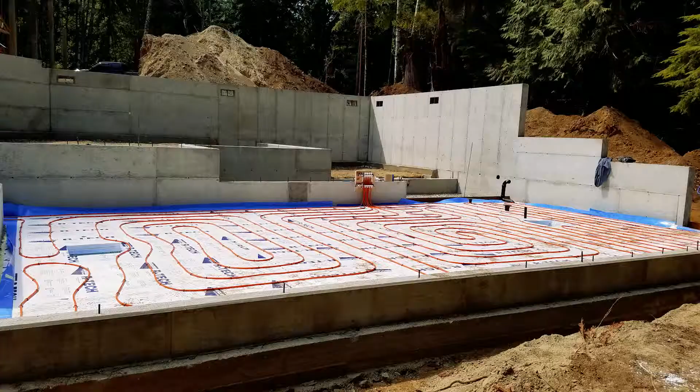So I just opened the box for the floor heat here. This will be the main system for the house. Right now I have a small one-zone system that's just running the basement slab and keeping the house warmed through the winter. But since I'm here in the pole barn, and it's been like 38, 39 degrees in here with the humidity around this level, let's take a walk over and look.

It's been pretty cold in this pole barn. Even though it's warm outside, it stays cold - a low of 39 and a high of 43. The humidity has been between 83 and 85% the whole time, and it doesn't seem to budge off of that. Might as well hook up the heating system and warm it up a little bit in here to drop that humidity down to reasonable levels, because we don't want any of this stuff to start to mold for no reason.

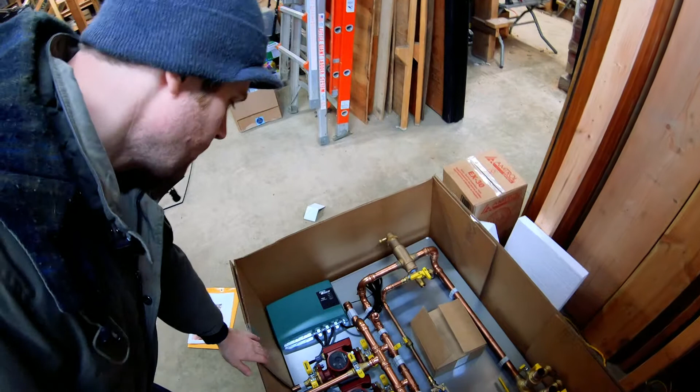So this is a 3-zone system. You've got your 3 pumps here. That's an expansion tank right there that will go right where that box is. This goes to your heat source. This is your fresh water that comes in - it's your fill, this is your little backflow preventer and your pressure bell. That hole and this hole, there's some pressure gauges in that box that get screwed in. And this is your air vent. A pretty simple system all in all.

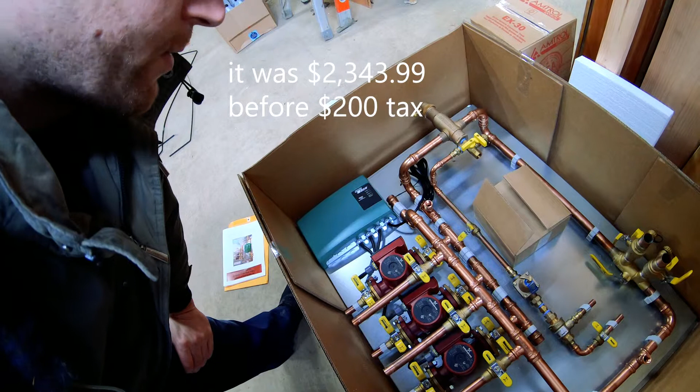But it was, I think, like $2,200 to $2,300, something like that. So, not exactly cheap, but the heat they deliver is fantastic.

And hopefully this one doesn't have any leaks. So the plan today is to take the dimensions of this and go down and figure out how it will fit into the basement. Go down in the basement and figure out how to take apart the old system, drain it, and insert this one, and connect everything. Looks like I can make a parts list of what I need, because I'm going to have a lot of stuff to get connected. I'll also look at the weather before I take apart everything, and make sure I'm not going to expose the house to freezing temps without a heat source. So I'm going to go take a look.

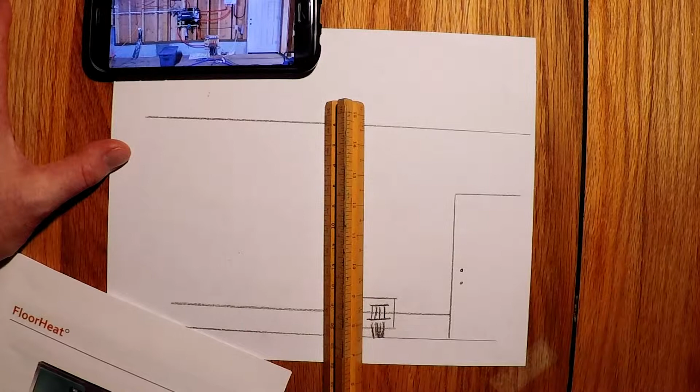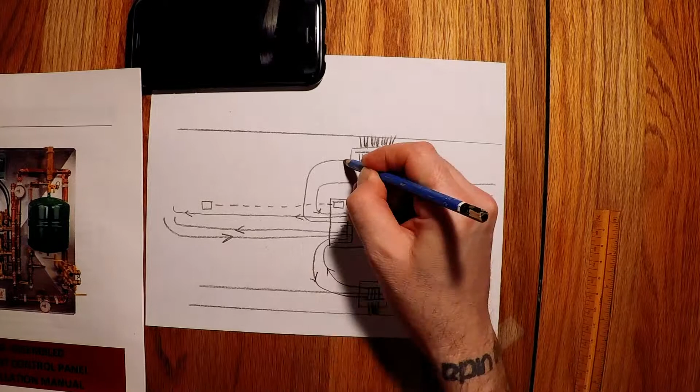So I went down and took a picture of the system that I have down in the basement, and I took it home and decided to sketch up a rough sketch of what's down there so I can get an idea of how I'm going to run some of these heating tubes and orient all the various components in this system. Just a quick rough crude sketch to get a rough idea of everything, and then next I'm going to do a more precise drawing so I can get a more accurate description of the parts I'll need for this. I always like to draw everything out.

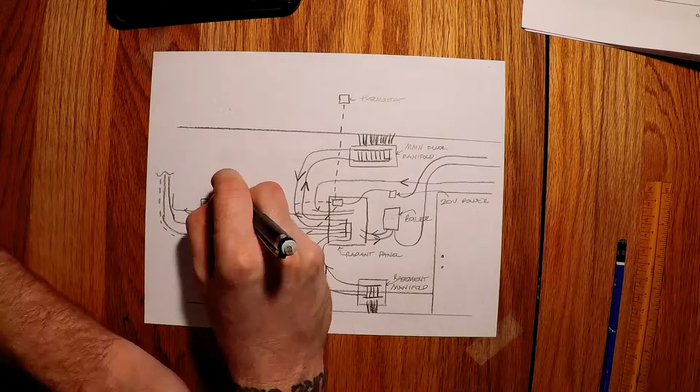It just helps me flesh out my ideas and make sure I don't waste too much time while actually doing the task. Plus, I just like drawing. So I threw some labels on if you wanted to know what all my chicken scratches mean. Now I'm going to do a more accurate sketch. Really, until I actually do it, it still could change, but hopefully this will give me a pretty accurate idea of the parts I'll need to get it all together. I'll of course order some extras just in case, to give me a little extra option in case I come across something I can't foresee before doing it.

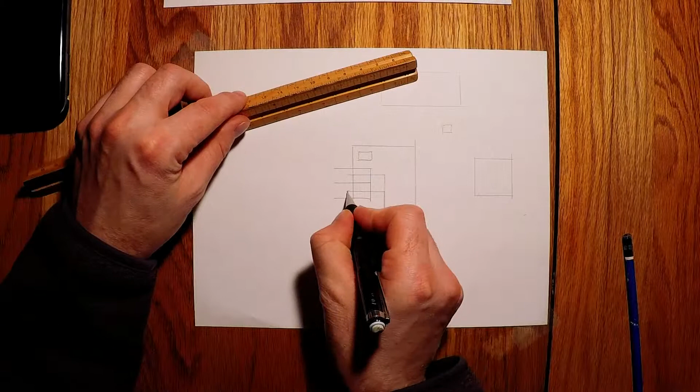And with PEX, I thought it would be easier, but that 1-inch PEX, with how curvy it is, I'm really thinking I'm going to try to do it with 1-inch copper if I can. Straight pipe is so much easier to deal with. When you get these curvy sections that are unruly, it really takes the fun out of it. So instead of using PEX like I set up the temporary system with, I'm going to go buy some 1-inch copper and be done with it.

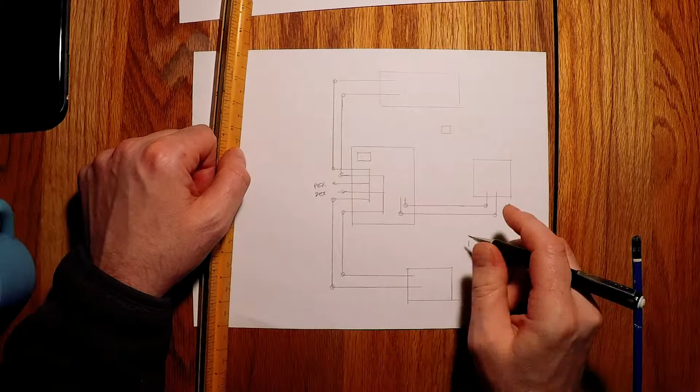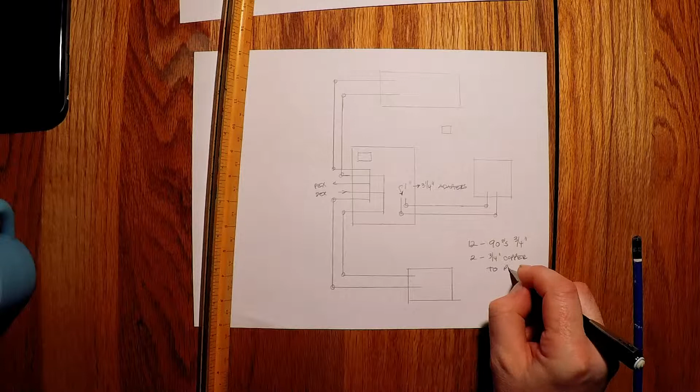So that's pretty much it for today. I just wanted to unpack the new hydronic radiant system I got, look it over, and try to start developing the parts list I'll need. I wanted to run through and get familiar with the system, get an idea of what I'll need to get it up and running, and check exactly what came with it - I didn't know it came with a pressure valve and the auto feed, and I'd already ordered one, but I'll put that to use somewhere else. Anyways, that's it for today. Planning day, it's all work. See you next time.